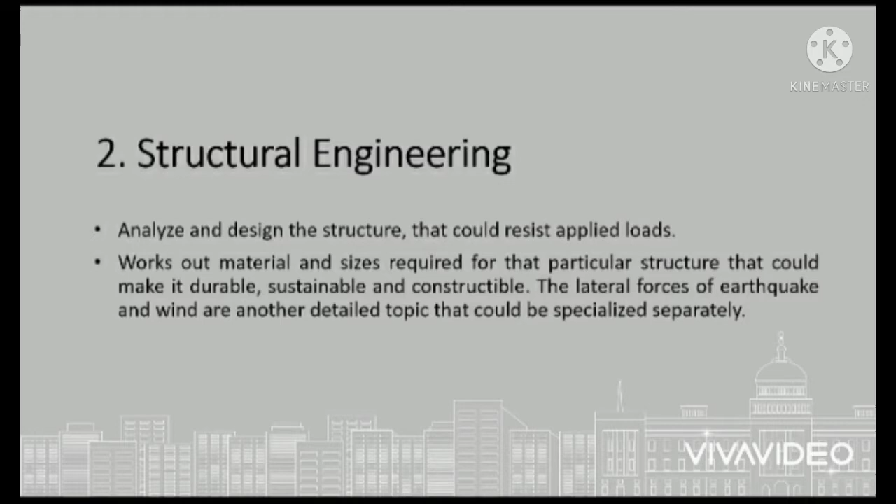Second is structural engineering: analyze and design a structure that could resist applied loads. They work out materials and sizes required for the particular structure that could make it durable, sustainable, and constructible. The lateral force of earthquake and wind are another detailed topic that could be specialized separately.

Number 3: construction engineering. Construction engineering brings the paperwork design to reality. Time, cost, and quality are tangible parameters of construction engineering. They confirm availability of material, equipment, and labor, identify any constraint and hazard, scope and trend, economical and safety aspects of a project.

Geotechnical engineering is concerned with the properties of soil and rocks on which the foundation of any structure have to be laid down. Properties of soil are so variable that it is very difficult to evaluate the soil mechanics. Experimentally work out soil types, bearing capacity, penetration tests, moisture content, and shear capacities. On the basis of this result, the foundation of a structure is designed.

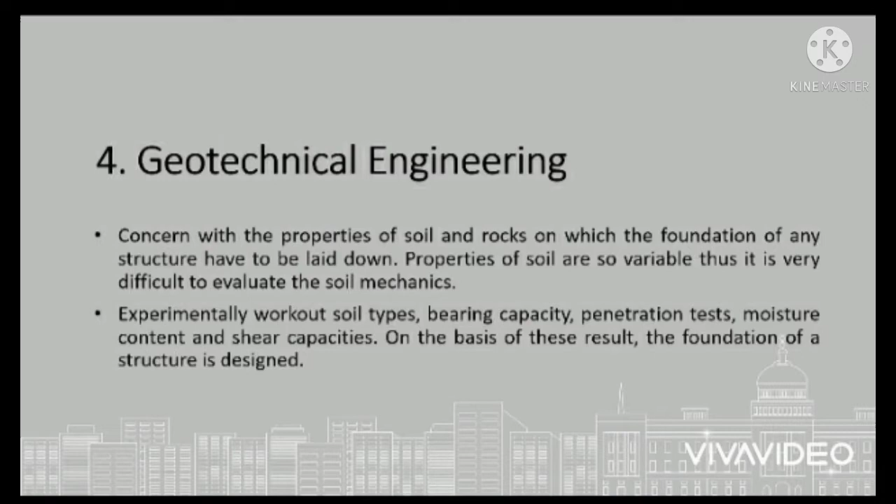Material engineering is the study of material properties used for construction purpose. Traditionally used construction materials are steel, wood, and concrete. They work out to bring innovative materials such as addition of polymer and fabrics in reinforced concrete, which gives a high strength and flexible material.

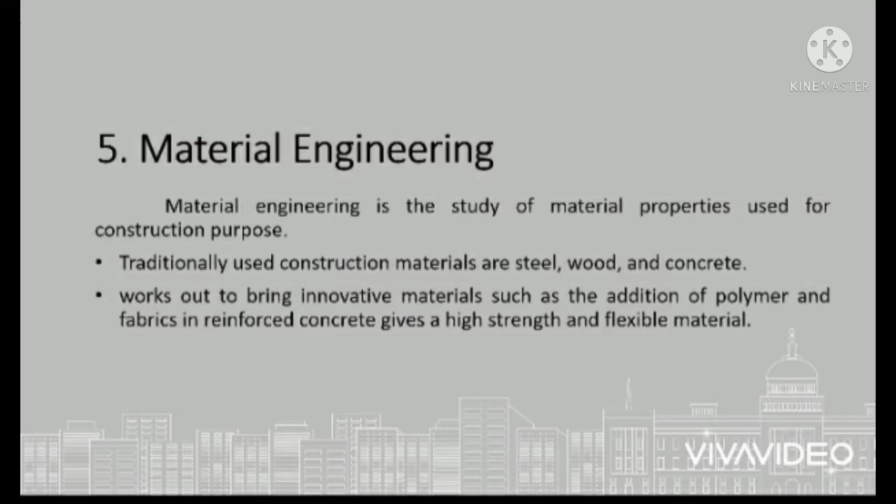Water resources engineering is the study of fluid mechanics, hydraulics, and water resource management. They study the natural cycle of water and work out methods to use it efficiently. They observe all natural water reservoirs and ways to preserve them. They design facilities for supply of water to localities and also design irrigation water supply systems.

Last, environmental engineering. This is the branch of civil engineering that deals with the environmental feasibility of a project. This concerns the treatment of water, solid waste, chemical and industrial effluent that may pollute the environment. It deals with energy efficient, environmentally friendly, sustainable, and green building construction techniques. It aims to provide safe drinking water, pollution-free environment, recycling of water and waste material, and renewable energy generation.

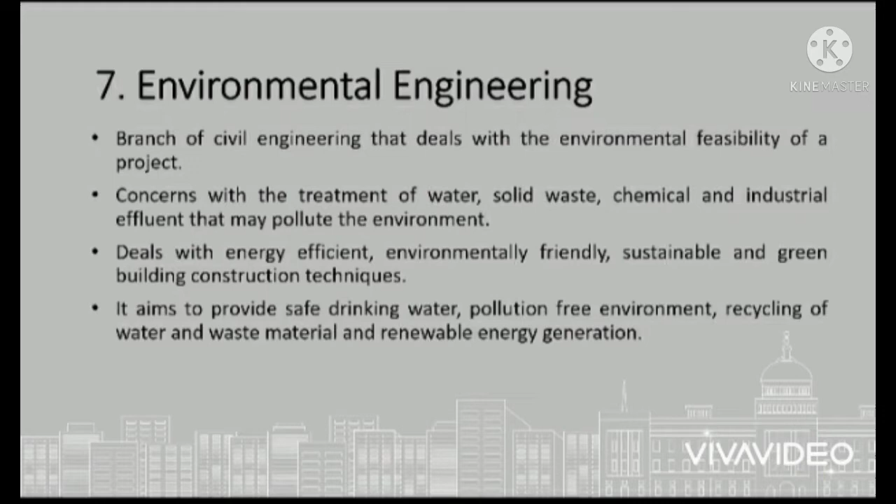At this moment, we will be discussing the selection of civil engineer, skills and competency requirements in the construction industry. So here was the highlight for today. Topic highlights: we will be talking about civil engineer job specifications, such as civil engineer requirements, civil engineer job description, civil engineer responsibilities, job responsibilities, and duties and responsibilities of a civil engineer.

So I'll give you a quote for this day: 'The engineer has been and is a maker of history,' by James Kip Finch.

So we will be talking about what is the civil engineer job specifications. This may include the vital skills, background for the position, and the qualified individuals. So we will be discussing the skills that you need to have if you are going to apply to be a civil engineer, background for the position, and the qualification to be a civil engineer.

So this is the requirements for the civil engineer. You must be a graduate of a bachelor's degree in civil engineering or related field. Registration or taking a licensure as a professional engineer may be required. You must have taken and passed the board exam, and you must have 5 to 7 years of experience.

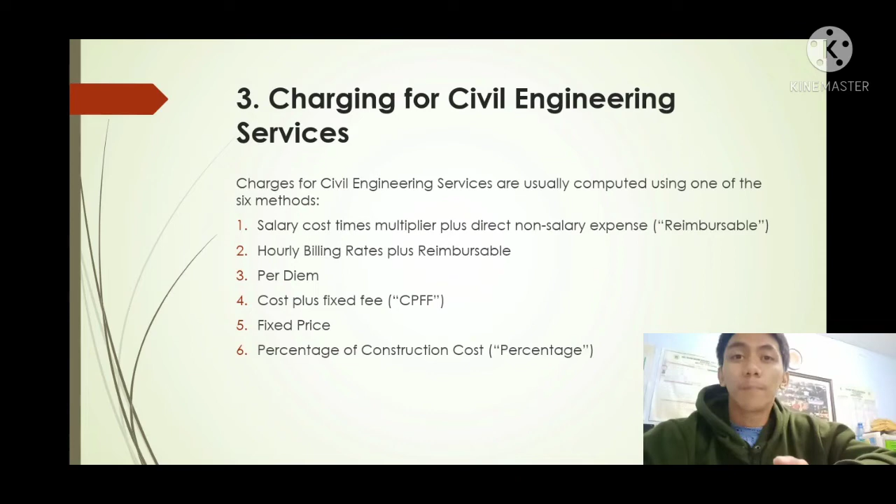First, I will discuss the reimbursable. So, what is reimbursable? Reimbursable, in short, means to repay, refund, to pay back, or compensate.

So, dito sa salary cost is defined as direct salaries plus employee benefits. Dito papasok yung mga sick leave, vacation, holiday, and incentive pay.

For example, kapag ang isang empleyado ay buntis, pwede siyang mag-maternity leave pag manganganak. Tapos, pag magbabakasyon naman, meron naman talaga yung mga empleyadong tinatawag na vacation. Bayad pa rin yun kahit nasa bakasyon sila. Then, holiday. Most especially kapag Christmas, meron sila mga natatanggap na bonus, ganyan. And syempre yung mga goods.

Depende sa empleyado kung magbibigay talaga sila. Next is yun nga, incentive pay. Papasok din doon yung mga bonus, mga iba pang other matter na related yung pera.

Next is yung unemployment and other payroll taxes. Dito papasok yung mga contributions for social security, workers' compensation insurance, retirement, medical, and etc. So, sa unemployment and other payroll taxes, papasok dito yung sa SSS, sa mga PhilHealth, yung mga medical insurance natin.

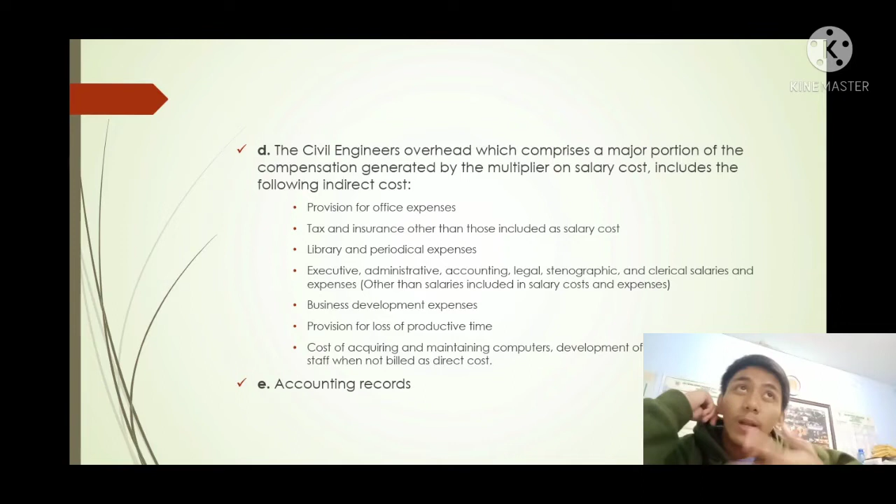And the last one is yung accounting records, under the reimbursable. So, accounting records include records of assets, liabilities, monetary transactions, ledgers, journals, and any supporting documents such as checks and invoices. So dito, sa accounting records, syempre, from the word records, ito yung mga kinikip ng mga empleyado as a record for some documents, like yung assets and liabilities, na alam naman nating lahat ng empleyado kailangan talaga or required na magbigay ng kanilang records for assets and liabilities.

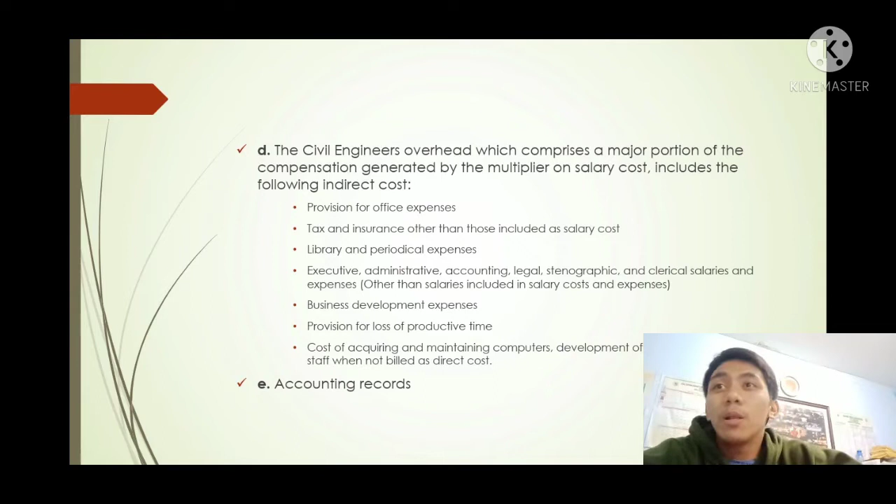So, tapos na tayo sa number 1, yung salary cost times multiplier plus direct non-salary expense or reimbursable. Dadako tayo sa pangalawa, yung hourly billing rates plus reimbursable.

So, sabi dito, the hourly billing rate method of compensation is very similar to the salary cost times multiplier method. So, parehas lang, medyo may similarity yung hourly billing rate method at saka yung salary cost times multiplier method. Pero sa hourly billing rate, nandito yung all direct personnel expense, overhead, and profit.

Direct non-salary expenses are a separate item for reimbursement, usually with a service charge. So dito sa direct non-salary expenses, iba siya sa reimbursement na tinatawag. Kadalasan daw, ito yung may mga service charge or masasabi nating incentives kapag hindi na sakob ng trabaho mo yung ginagawa mo.

Like for example, meron kang project na ginagawa, then natapos mo na yung project mo, medyo maluwag pa yung oras mo, gumawa ka pa ng mga productive matter na makakatulong sa company nyo, doon papasok yung direct non-salary expenses na siguro in between na lang sa inyo ng boss mo at ng empleyado kung ano yung mga matatanggap mong service charge. Yung ganon.

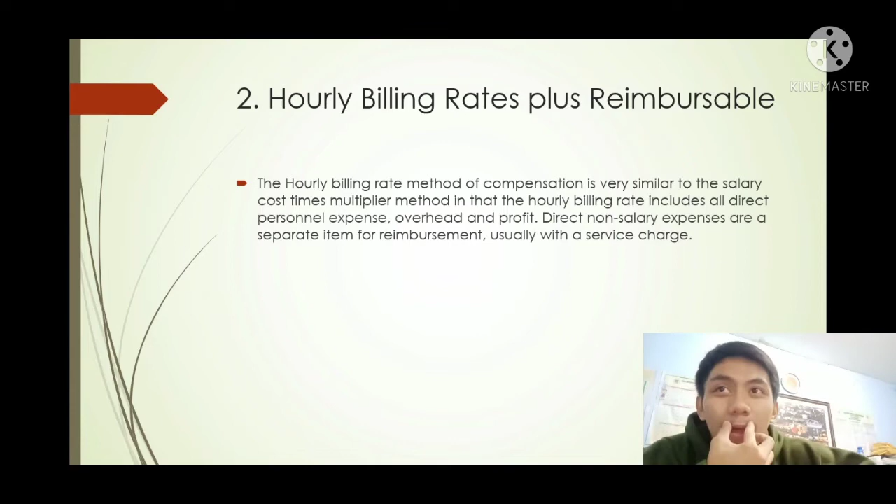Then, the third one is the per diem or fixed charge per day. So dito sa per diem, every day to binabayaran yung per day mo. Tama ba? Kasi similar to the multiplier approach, hourly billing rate plus reimbursable is based on the consultant cost that performs the service. It can be used for cases where the extent of the project is not certain.

Moreover, the consultant and the owner should agree on specifying the expected range of the project and the methods for adjusting not to exceed amount. In the case the cost closes to not to exceed amount, then the owner should be informed and provide modified cost estimate for the completion of project. This approach may be specified and employed in the case where the project range is not defined properly, simplified accounting, considerably short project assignment, the extent of the project is defined adequately, and on-site construction management services.

So yun yung per diem. Sabi dito, in the case the cost closest to not to exceed amount, then the owner should be informed and provide modified cost estimate for the completion of project.

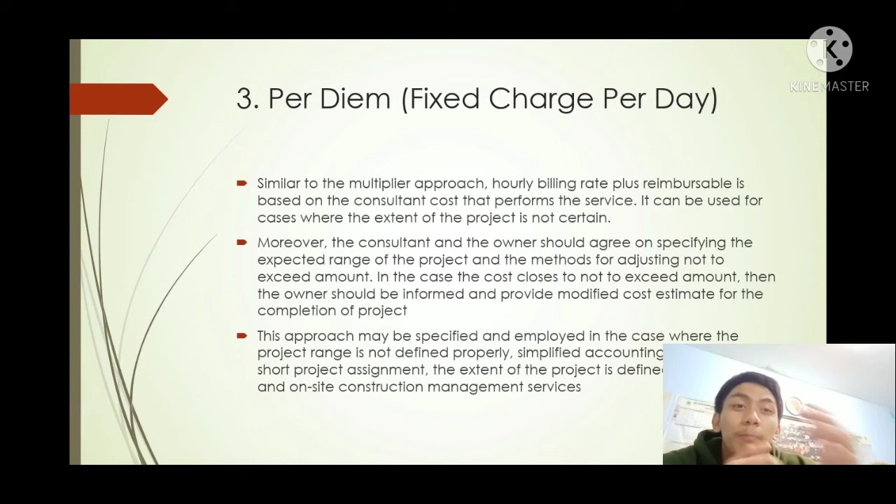In case na yung magagastos ay hindi naman mag-exceed, kailangan yung owner, ano ba tawag dito? Yung owner o yung contractor dapat aware or informed na yung amount is hindi mag-exceed para at least safe yung contract nyo, yung usapan ng dalawa o nung owner, diba? Para kung mag-exceed man, malalaman niya agad na yung amount ng project na to ay mag-exceed, at least magiging prepared siya sa dadagdag niya kung magkano pa, yon.

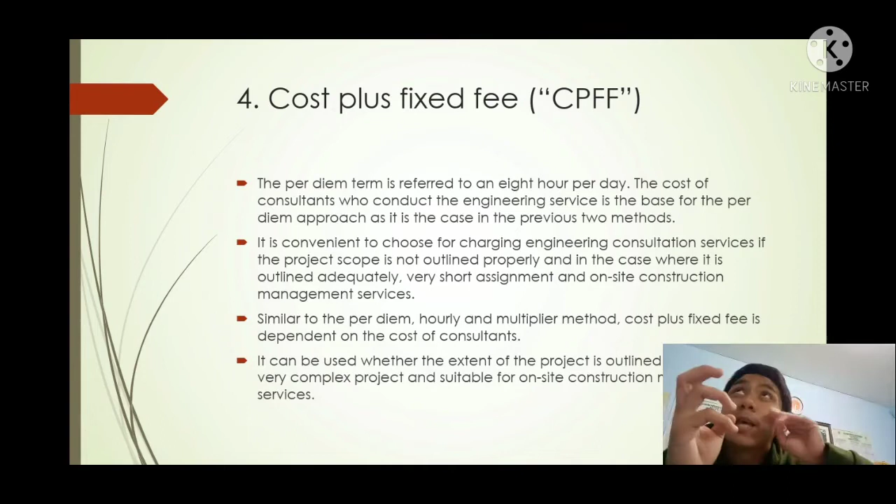Next is the cost plus fixed fee or the CPFF. So the per diem term is referred to an 8-hour per day. So dito, sa cost plus fixed fee, sa per diem is per day siya, di ba? Dito sabi, ang per diem term is referred to an 8-hour per day. Kasi usually yung mga nagtatrabaho talaga, mga empleyado, usually 8 hours talaga yung kanilang working hour. And yun yung dapat bayaran per day, yung 8 hours nila.

So the cost of consultants who conduct the engineering service is the base for the per diem approach, as it is the case in the previous two methods. It is convenient to choose for charging engineering consultation services if the project scope is not outlined properly, and in the case where it is outlined adequately. Very short assignment and on-site construction management services. Similar to the per diem, hourly and multiplier method, cost plus fixed fee is dependent on the cost of consultants.

So itong cost plus fixed fee or CPFF, similar din siya dun sa per diem, hourly, and multiplier method. Pero ito is nakadepende sa cost of consultants. It can be used whether the extent of the project is outlined properly or not. Very complex project and suitable for on-site construction management services. So itong method na to, maganda siyang gamitin or suitable siyang gamitin for on-site construction management services.

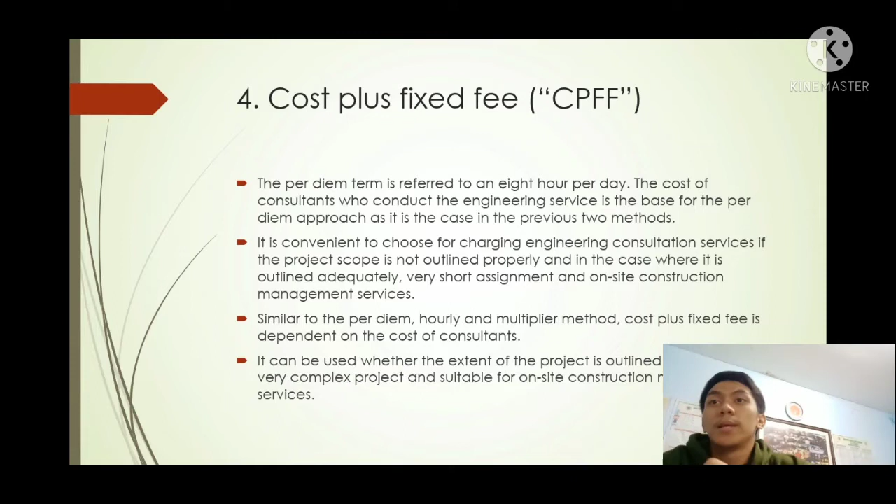So under a cost plus fixed fee agreement, the civil engineer is reimbursed for the actual cost of all services and supplies related to the project, including, may mga factors tayo na may be used to determine the compensation of the engineer for the services where the principal responsibility is the detailed design or construction supervision of facilities to be constructed. Second factor is the cost plus fixed fee as a prerequisite to equitable negotiations.

Yung cost plus fixed fee natin kanina or yung CPFF, prerequisite siya nung equitable negotiations that the client and the civil engineer defined and agree upon the scope of services the civil engineer has to perform. Meron dito mga negotiations, di ba? Yung mga kliyente at yung civil engineer dapat dun pa lang parang fixed na yung amount or yung cost ng project na pag-uusapan nila. Yon, dapat malinaw, clear.

So it is very similar to the salary cost times multiplier method in that the hourly billing rate includes all direct personnel expense, overhead, and profit. Yung tulad nga kanina ng binasa ko, yung salary cost times multiplier method, in that the hourly billing rate includes dun yung mga personal expense natin, mga pangailangan talaga, personal matters natin. The civil engineer is required to start providing service before the detailed scope of services can be determined in the two considerations.

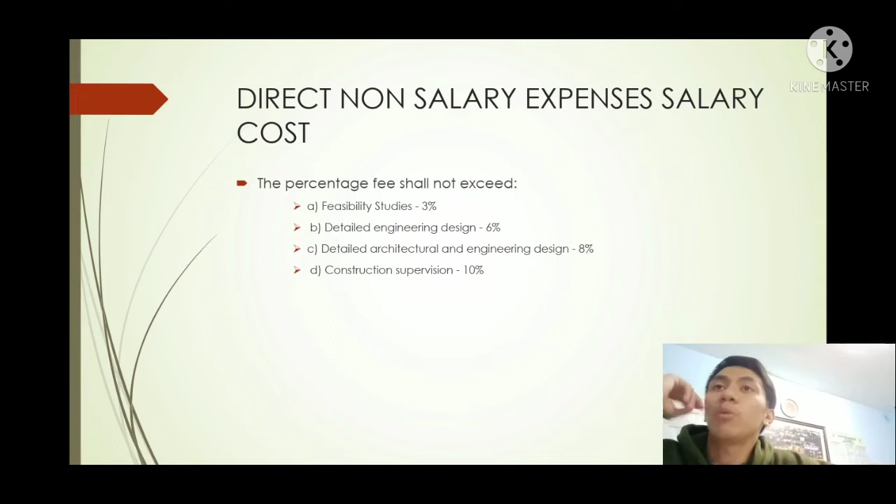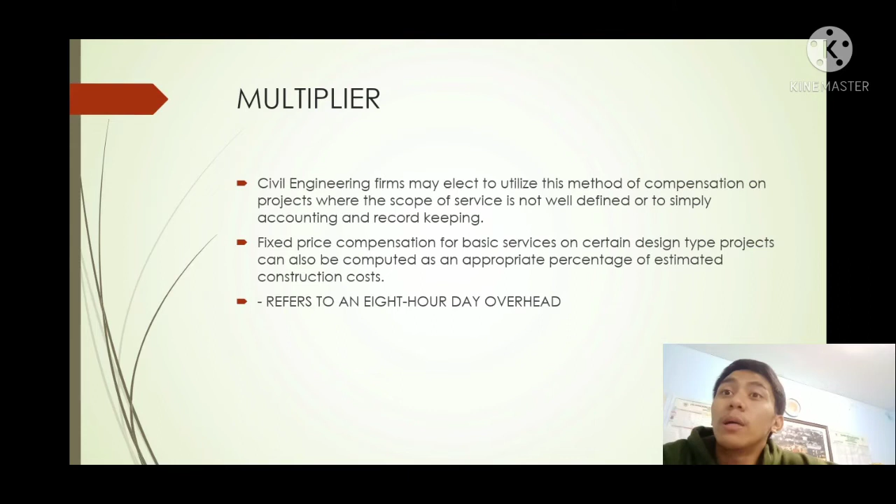So what does the multiplier mean? Civil engineering firms may elect to utilize this method of compensation on projects where the scope of service is not well defined, or to simplify accounting and record keeping. Fixed price compensation for basic services on certain design type projects can also be computed as an appropriate percentage of estimated construction costs, referring to an 8 hours day overhead.

The fifth method is fixed price or lump sum. We know that by the term fixed price, that is the price or the lump sum. Unlike the other four methods discussed above, the lump sum or fixed price approach is based on completion of the project, and the extent or range of the project needs to be defined adequately.

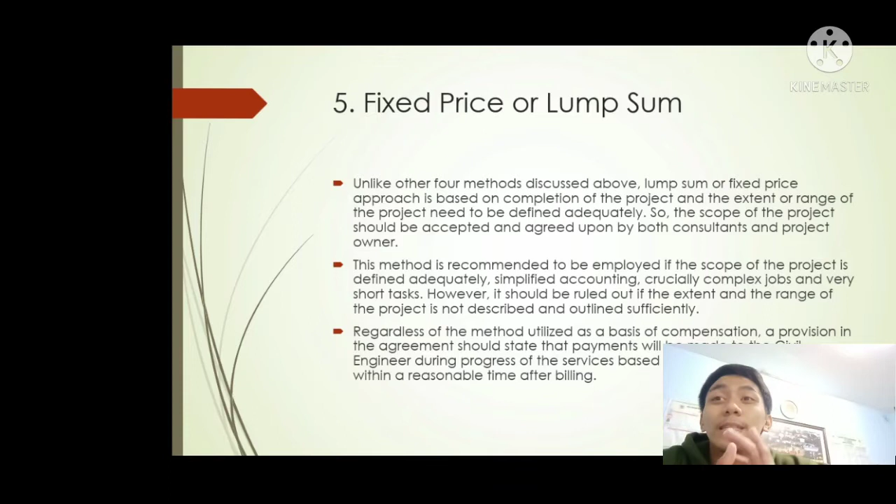So the scope of the project should be accepted and agreed upon by both the consultants and the project owner. There should already be an agreement between the two parties about the project. This method is recommended to be employed if the scope of the project is defined adequately, for simplified accounting, crucially complex jobs, and very short tasks. However, it should be ruled out if the extent and range of the project is not described and outlined sufficiently.

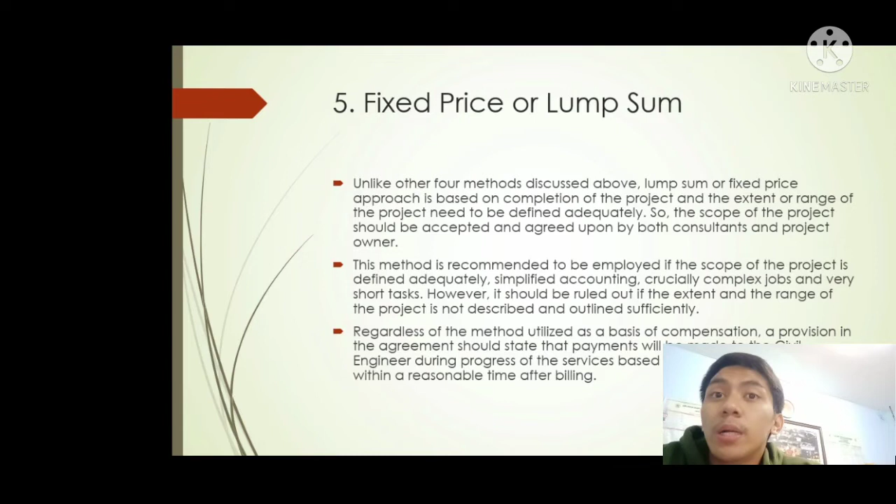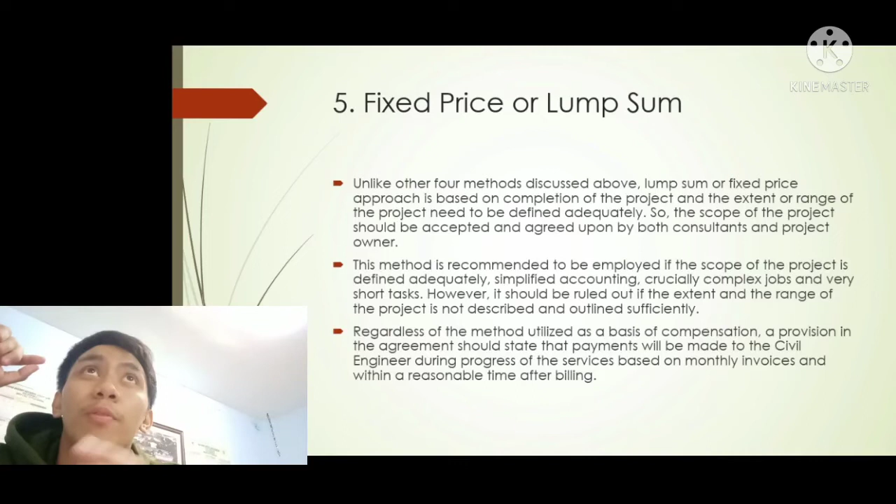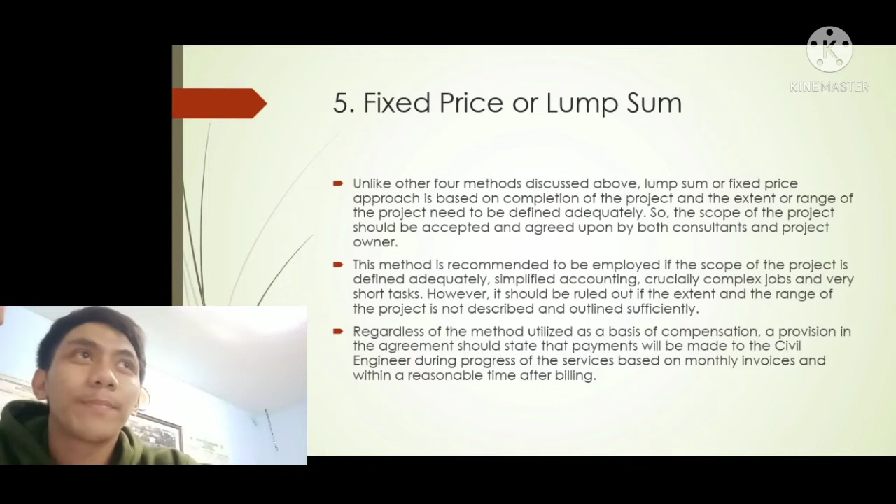Regardless of the method utilized as a basis of compensation, a provision in the agreement should state that payments will be made to the civil engineer during progress of the services, based on monthly invoices, within a reasonable time after billing. So there must be an agreement between the civil engineer and the owner or contractor about the price or amount of the project. Since it's a fixed price, payments are based on monthly invoices - for example, estimating materials that will be used, and pricing that into the monthly invoices, which should be paid by the client within a reasonable time after billing.

So the next and last one is the percentage of construction cost, or construction labor cost. Here's a fast fact: according to the industry standard Construction Labor Market Analyzer or CLMA, labor cost percentages in construction lie between 20% and 40% of the total project's budget. So if we have a budget for that project, the percentage labor cost falls within 20% to 40%. Costs that fall under the labor umbrella include not just wages but also things like payroll taxes, paid time off, workers' compensation, and other forms of insurance.

Also equipment such as vehicles and company phones, payroll fraud, which is more common and subtle than you might think, and recruiting and training costs. All of this is under the labor umbrella - not just wages, but things that really need to be paid to your employee or civil engineer.

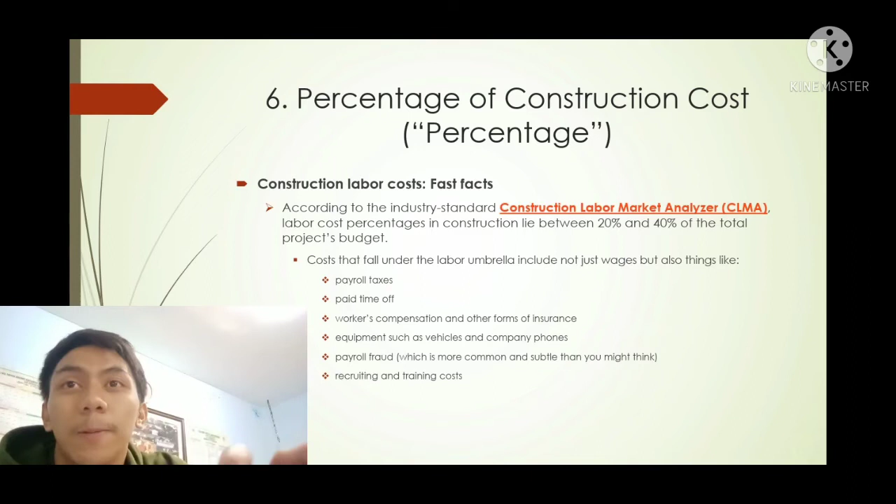So what is the percentage of the labor cost in the Philippines relative to the total cost of the building? According to Willie Segovia, it varies from 30% to 50% depending on the type of building, complexity of finishes, and location. So it always depends on the type of building - how big the project is, and its location. Of course, if it's in an urban location, it's probably more expensive.

For example, if the project location is in Manila, the price is higher because the standard there is also higher. Labor rates are highest in the National Capital Region because of the high cost of living and commuting, while in provinces, rates are lower. So as I said earlier, if you're in an urban area, labor rates are higher compared to the provinces or rural areas - the salary wage of employees there differs compared to Manila.

Labor cost is also affected by automation and toolsets. If companies use cranes, excavators, pumps, prefab systems, labor costs go down. So syempre kapag sa mga construction sites, may mga ginagamit na tayong tools, mga malalaking vehicles na mas mapapabilis ang work. Kaya yung labor cost ay bababa dahil hindi na gaanong kailangan yung human power, kasi mas naprovide na ng mga makabagong equipment.

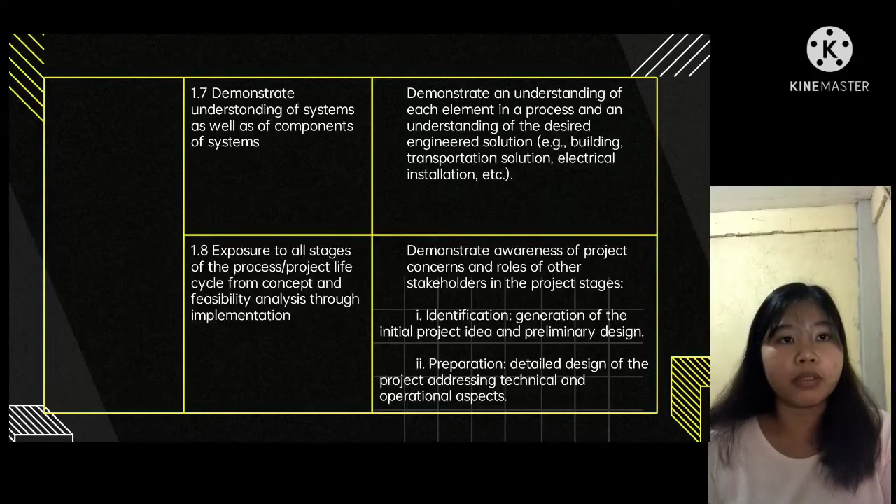Number 3 is appraisal: analysis of the project from technical, financial, economic, social, institutional, and environmental perspectives. Number 4 is preparation of specifications and tender documents: preparation of tender documents, inviting and opening tender pre-qualification, perform contract and tender evaluation and analysis in order to award work. Finally, complete the review of chosen vendors and contractors' drawings to ensure compatibility with other equipment and compliance with final contract documents.

Number 5 is implementation and monitoring: review and analyze variations against contract terms and conditions, supervise installation and commissioning, review and document project outcomes against requirements and conditions. Lastly is evaluation: monitor project progress and compare to program or timeline, and initiate remedial action where necessary.

The ninth competency under the technical category is to understand the concept of quality control during design and construction, including independent design check and independent reviews of design, field checks, and reviews. There are 10 project and construction management indicators under this competency. First is to draft, develop, and implement a master quality plan for the project, including site verification, quality control verification, and testing and sampling plan. Then, arrange for and obtain performance tests, witnessing of said tests, and other reviews as necessary to ensure that materials and equipment meet quality and performance requirements.

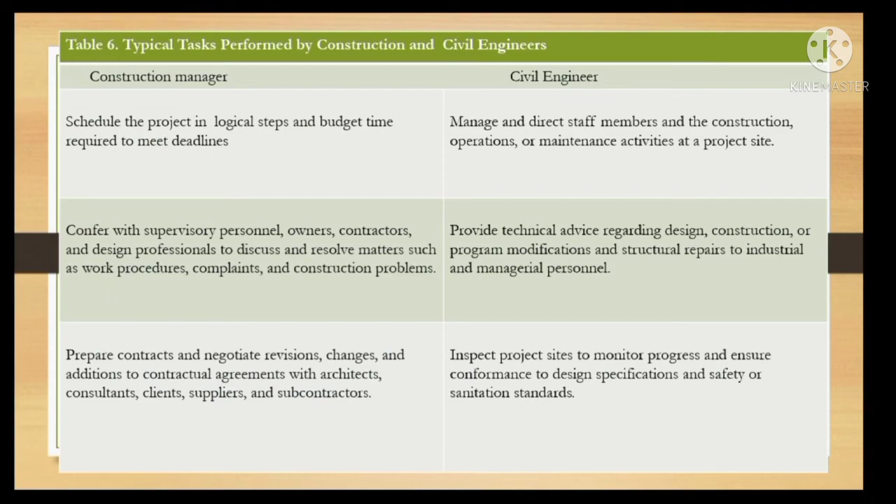They prepare and submit budget estimates, and progress and cost tracking reports. They also interpret and explain plans and contract terms to administrative staff, workers, and clients representing the owner or developer. They plan, organize, and direct activities concerned with the construction and maintenance of structures, facilities, and systems.

They take action to deal with the results of delays, bad weather, or emergencies at the construction site. They also inspect and review projects to monitor compliance with building and safety codes and other regulations, and study job specifications to determine appropriate construction methods, and select, contract, and oversee workers who complete specific pieces of the project such as painting or plumbing.

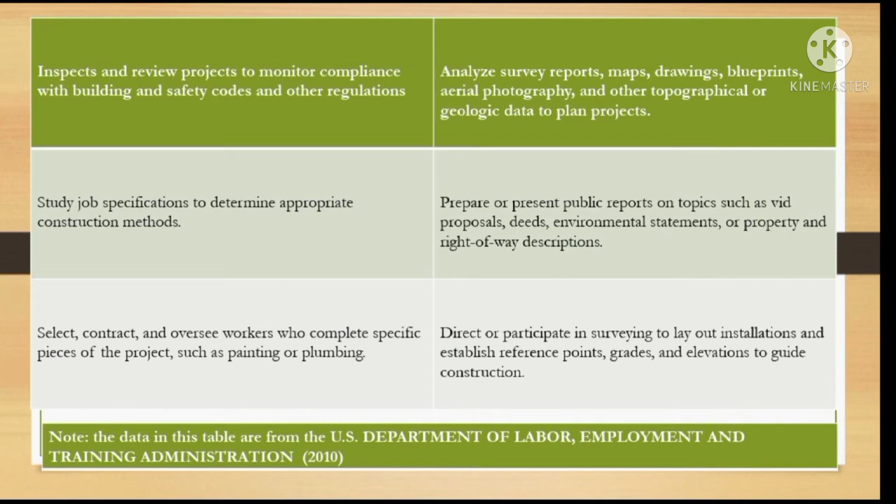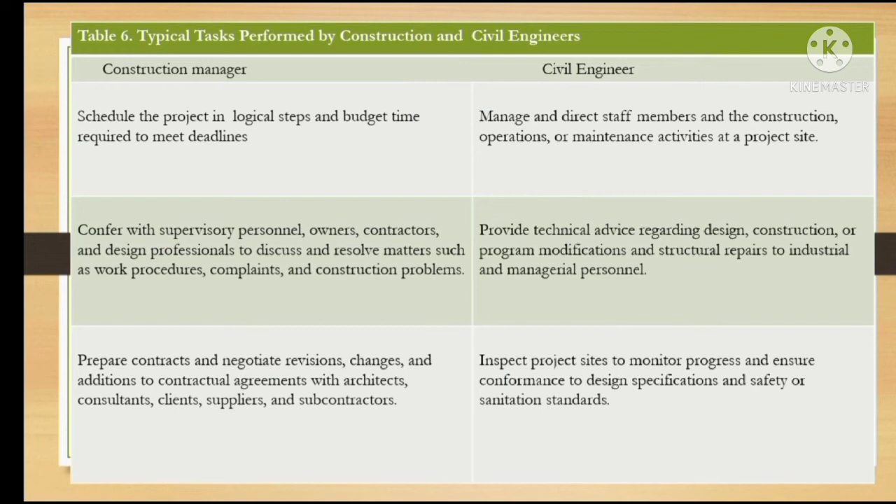While the civil engineer manages and directs staff members in the construction, operations, or maintenance activities at a project site. They also provide technical advice regarding design, construction, or program modifications and structural repairs to industrial and managerial personnel. They inspect project sites to monitor progress and ensure conformance to design specifications and safety or sanitation standards.

They estimate quantities and cost of materials, equipment, or labor to determine project feasibility. They also test soils and materials to determine the adequacy and strength of the foundations, concrete, asphalt, or steel. They are tasked to compute load and grade requirements, water flow rates, and material stress factors to determine the design specifications, and they plan and design transportation or hydraulic systems and structures following construction and government standards using design software and drawing tools.

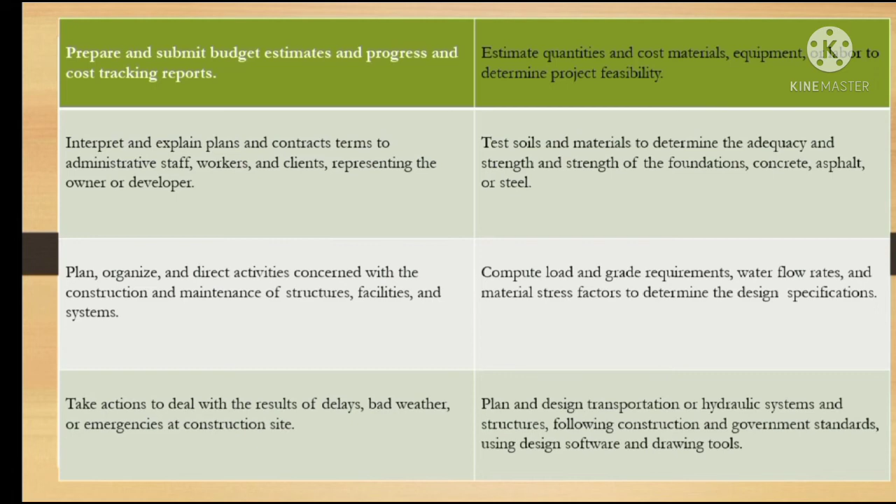They analyze survey reports, maps, drawings, blueprints, aerial photography, and other topographical or geologic data to plan projects. They are the ones who prepare or present public reports on topics such as bid proposals, deeds, environmental statements, or property and right-of-way descriptions. Lastly, they direct or participate in surveying to lay out installations and establish reference points, grades, and elevations to guide construction.

This table contains the major tasks performed by construction managers and civil engineers, despite some overlap, such as scheduling and estimating tasks which can be performed by either. The major differences are clear: construction managers handle people, cost, schedules, and legal and organizational aspects of the project.

Civil engineers focus on technical, scheduling, and logistical aspects of a project. The U.S. Department of Labor Employment and Training Administration 2010 defined the responsibilities of a construction manager as plan, direct, coordinate, or budget, usually through subordinate supervisory personnel, activities concerned with the construction and maintenance of structures, facilities, and systems.